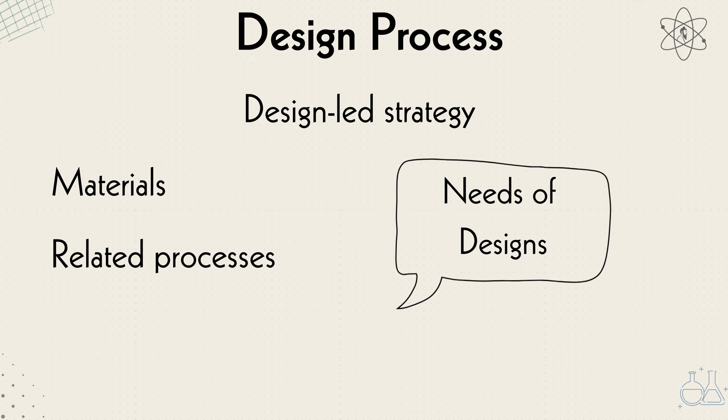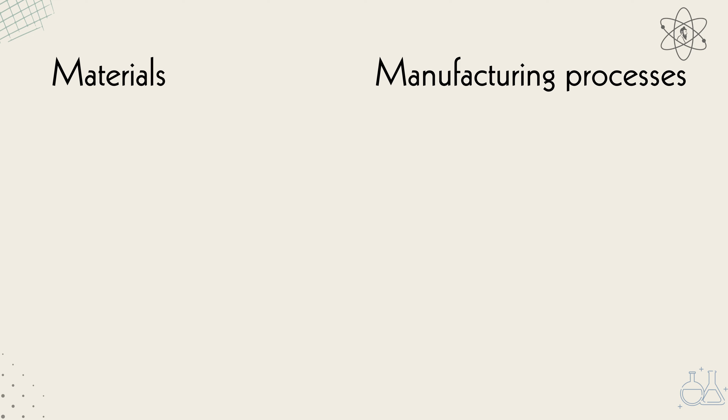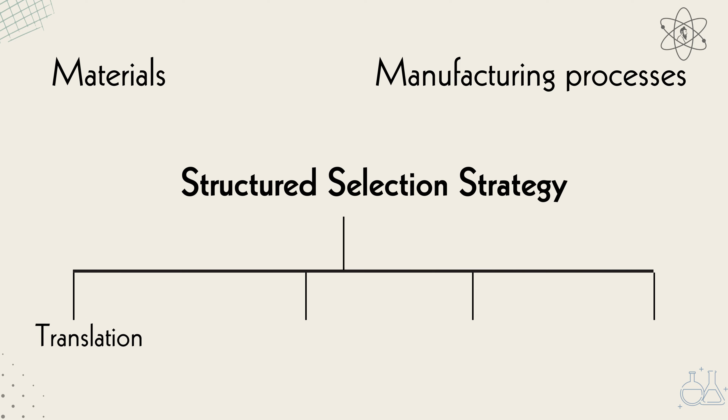Design begins with the market need. That need is analyzed and turned into a set of design requirements. From there, ideas called concepts are explored, developed, and refined into a detailed product specification. Material and process choices aren't separate, they evolve alongside this development. With that foundation, we can move into a structured selection strategy. It unfolds in four key steps: translation, screening, ranking, and documentation.

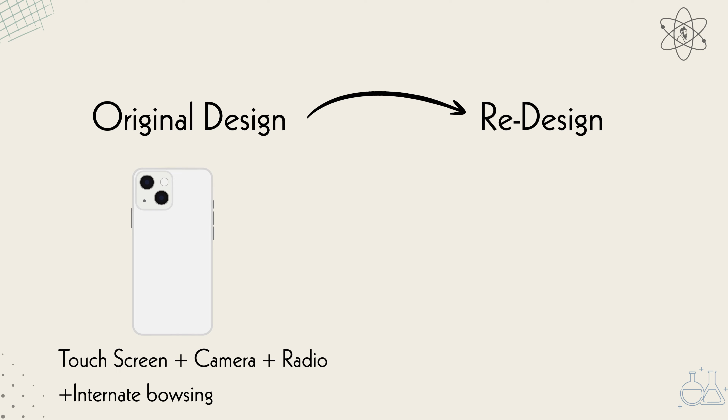There are two types of design: the original design and a redesign to the original design. Original design begins with a fresh idea, something entirely new. It involves building the information and system needed to bring that concept to life. Evolutionary design, on the other hand, starts with an existing product and refines it, boosting performance, cutting cost.

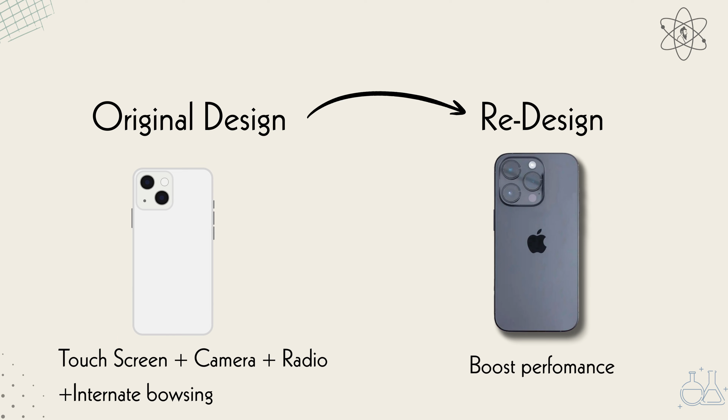Sometimes the demand of a new product leads to the invention of entirely new materials. Nuclear power led to the creation of zirconium and advanced stainless steels. The space race drove innovation in beryllium alloys and lightweight composites. And today, turbine engines push the boundaries of high temperature alloys and ceramics.

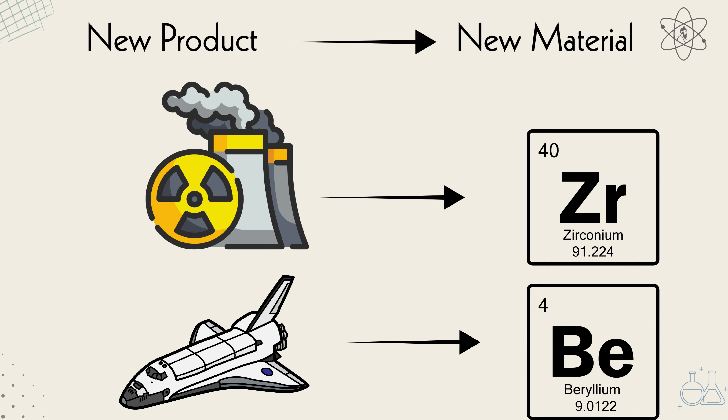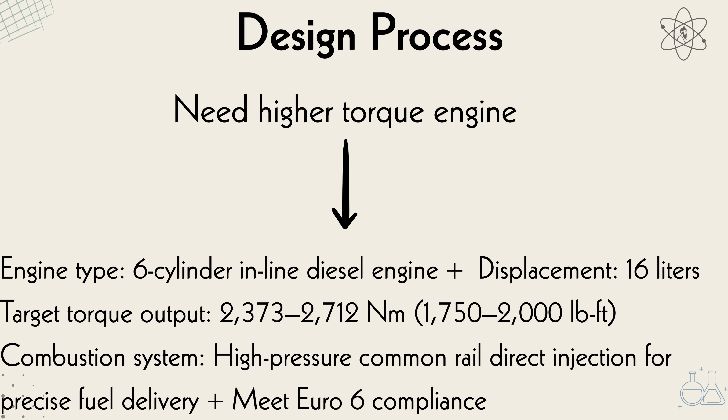But this is not always the case. Design always begins with a need or a bold idea and ends with a full product specification. But no need can be met unless it's clearly defined. That's why every design journey starts with a simple focused statement: a device is required to perform task X. This becomes the foundation of a clear set of design requirements.

In the conceptual design stage, all possibilities are on the table. The designer explores different concepts, experimenting with how they can be combined or separated to meet the design goals. Once promising ideas are identified, the process moves into the embodiment stage.

In the embodiment stage, the concepts are analyzed in more depth. Components are roughly sized and clear choices of material and processes are made to understand the performance and cost implications. This stage results in a workable layout, which then feeds into the detailed design phase.

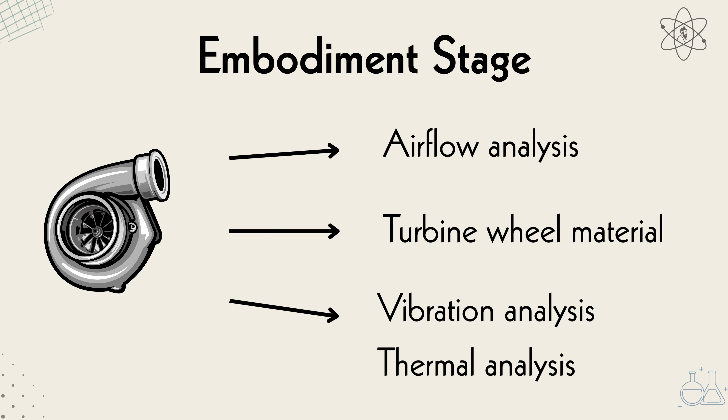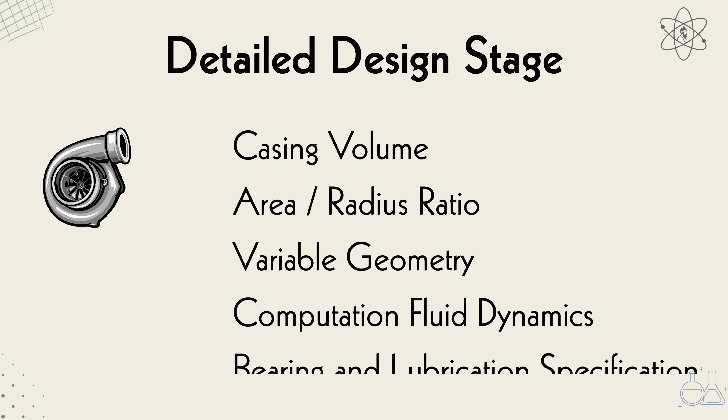In the detailed design phase, every component gets fully defined with precise dimensions, specifications, and often mechanical and thermal analysis. Optimization techniques are used to fine-tune the system for maximum performance, minimum cost, and safety. The final materials, geometries, and production methods are selected. By the end, a complete product specification is in place.

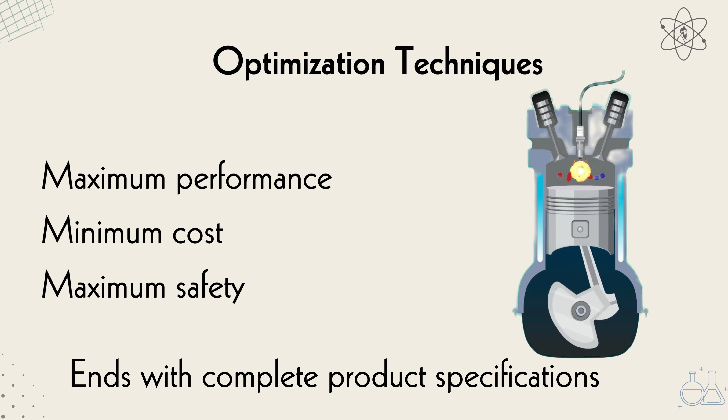Now let's talk about redesign. It's worth noting that most design work isn't about inventing from scratch. It's a redesign, building on existing products, solving problems, improving performance, and cutting cost, without changing the core principles or discarding well-functioning parts.

Redesign often begins with a problem, and there are several scenarios that call for it. The most urgent is the product recall situation. If a product on the market fails safety standards, redesign becomes critical. Often, the root cause is a material failure. In such cases, a new material must be selected, one that keeps the strength of the original while fixing its flaws.

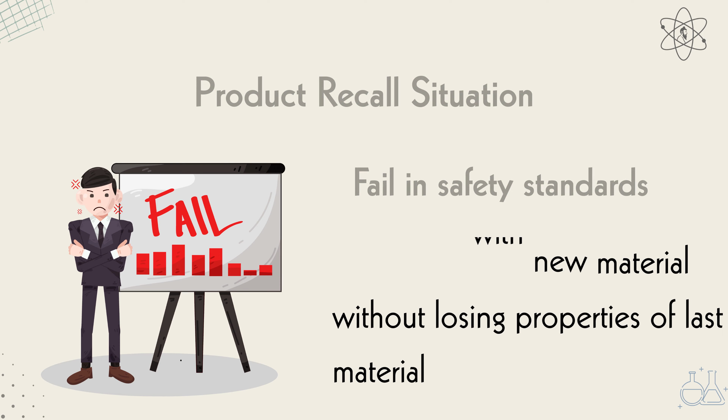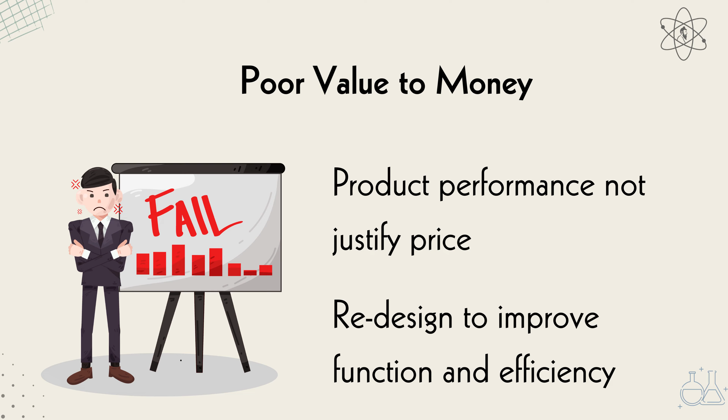Then, there is a poor value for money scenario. The product may be safe, but its performance doesn't justify the price, prompting a redesign to improve a function or efficiency. Since much of a product's cost comes from materials and processes used, the solution is often to rethink both with cost cutting in mind.

Another common driver is competition. In fast moving industries like consumer electronics or automotive, new models are rolled out every year or two. To stay ahead, companies must continuously refine and innovate, often through material or design upgrades.

But the role of material doesn't stop once production begins. Products can fail in real world use, and every failure tells a story. Wise manufacturers gather and analyze this data. It often reveals a mismatch between material and use, something that smart redesign can correct.

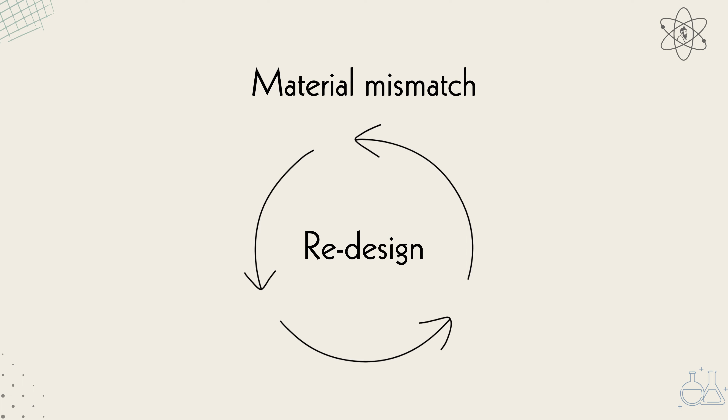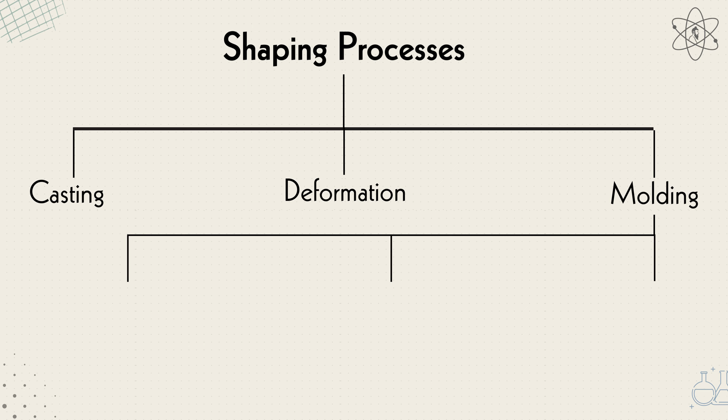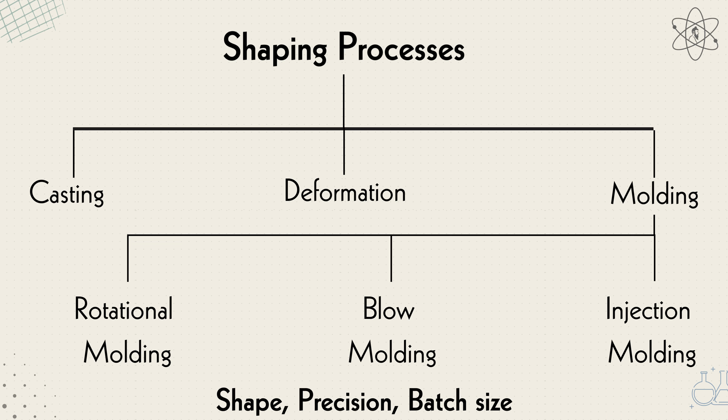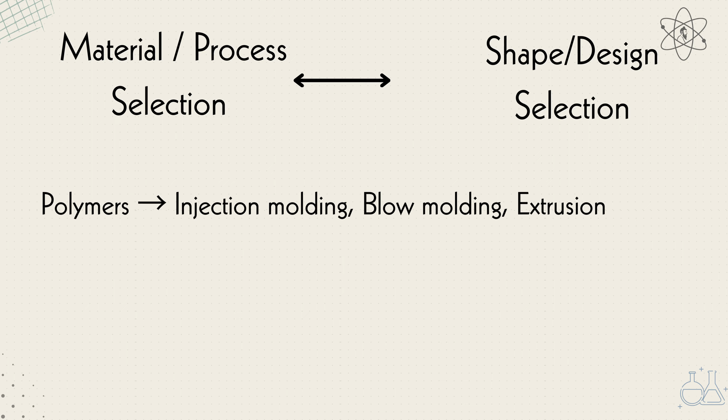The choice of process is closely tied to the material. The material's formability, machinability, weldability, and heat treatability all affect what processes can be used. At the same time, the requirements for shape also influence process choices, because the process defines not just the geometry but also the size, precision, and cost of the component. It's a two-way interaction: specifying a shape can limit your material and process options, and choosing the process can limit which material and shape are possible. The more complex the design, the more tightly these factors are linked.

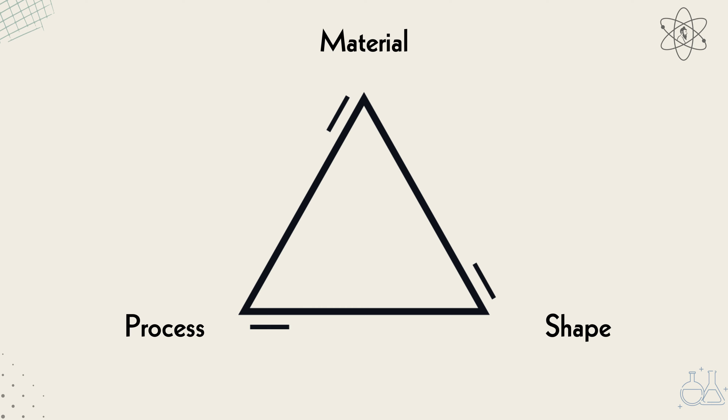At the center of all this lies the crucial interaction between material, process, and shape. And to manage it effectively, we need a design strategy. That strategy has four key steps: translation, screening, ranking, and documentation.

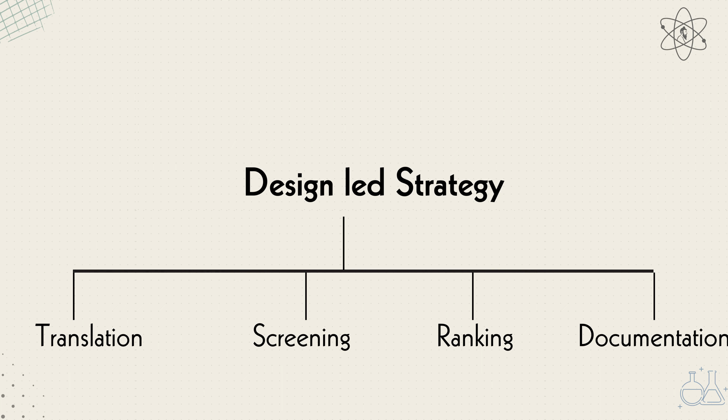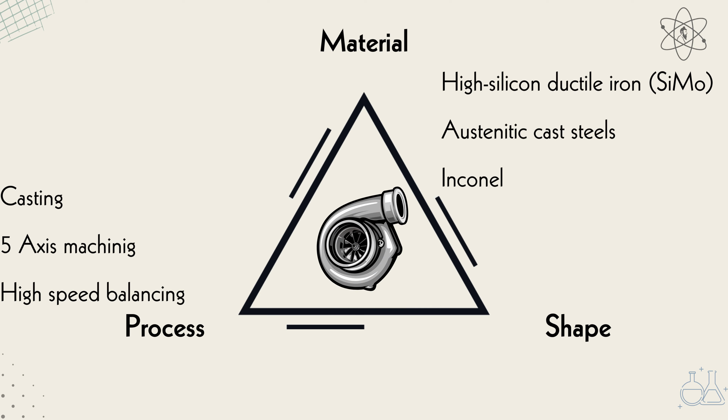Selection begins with finding the best match between what a design needs and what materials and processes can deliver. Keep in mind that materials and processes must be compatible. The first step, translation, is about turning design requirements into technical language, identifying constraints that must be met and objectives to optimize. This acts as a filter. Materials that pass the constraints and perform well on the objectives move forward.

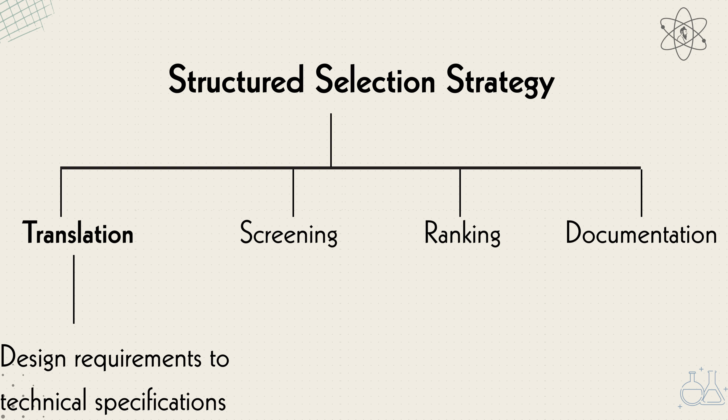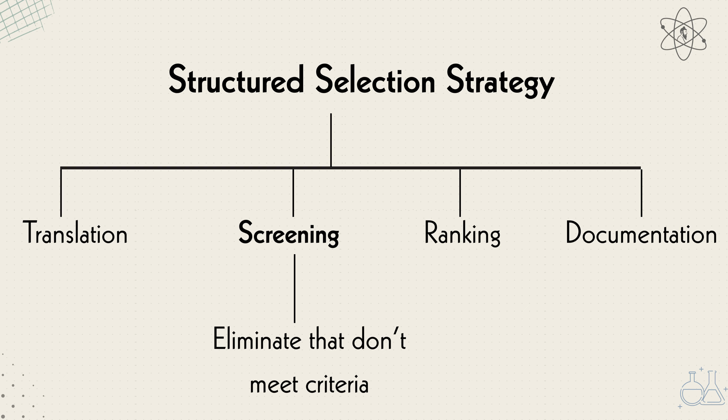Next comes screening, eliminating all the materials that don't meet must-have criteria. Then, in the ranking stage, the remaining candidates are ordered based on performance metrics like cost, weight, or strength.

Finally, we dig deeper into the top choices. We look at how they are used today, how to design effectively with them, and what case studies, both success and failures, can teach us. The last step is called documentation, and it completes the selection process.

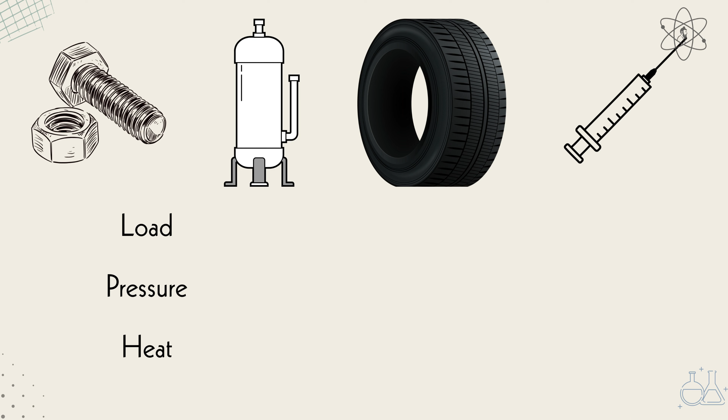Every engineering component is built to perform one or more functions, whether it's supporting a load, containing pressure, or transferring heat. But achieving that function comes with constraints. There may be a fixed dimension, limits on how much load a part can carry, or requirements to conduct or insulate against heat or electricity. The component also has to perform within a specific temperature range and environmental condition.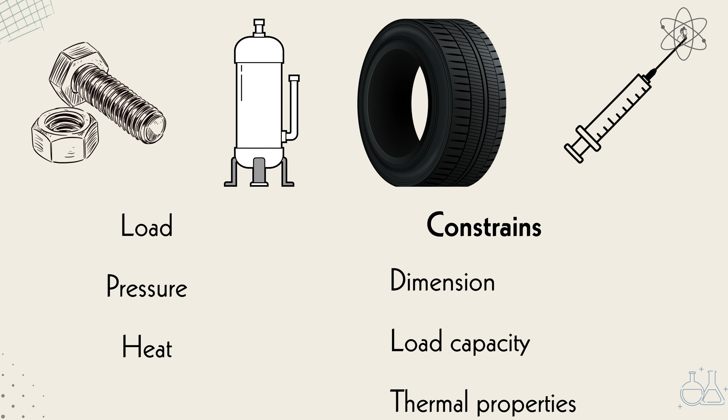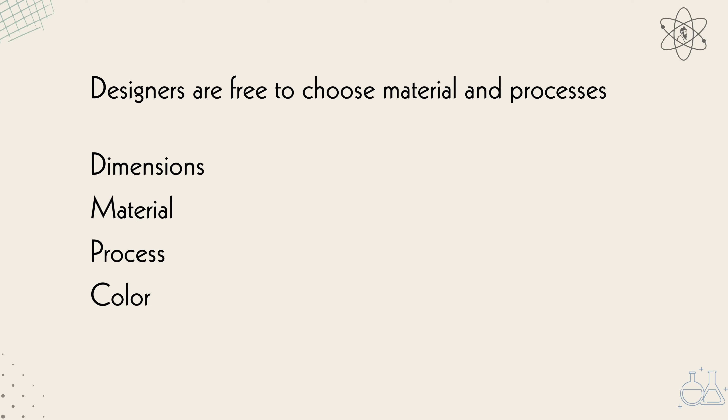Within these boundaries, the designer still has some freedom. Dimensions are not fixed, but can be adjusted. And most importantly, the designer is free to choose the material and processes to shape it. These adjustable factors are called free variables.

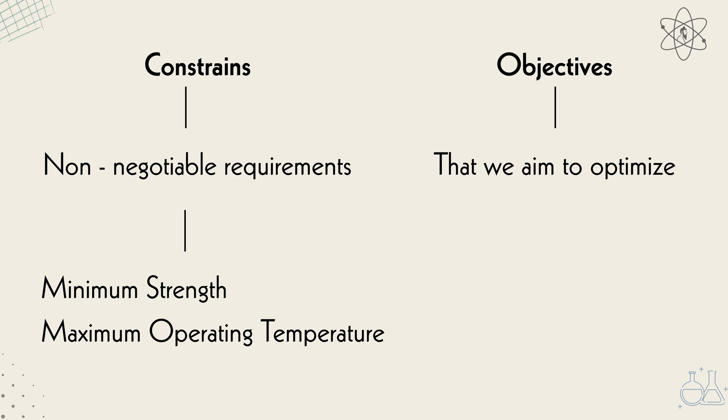It's essential to understand the difference between constraints and objectives. A constraint is a non-negotiable requirement like minimum strength or maximum operating temperature. An objective, on the other hand, is something you aim to optimize, usually by minimizing or maximizing a specific property like cost, weight, or performance.

For a super light sports bicycle, the main objective is to minimize mass while keeping cost within a limit, making cost a constraint. But for an affordable city bike, the roles are reversed. The goal becomes minimizing cost, and keeping weight below a certain level is now a constraint.

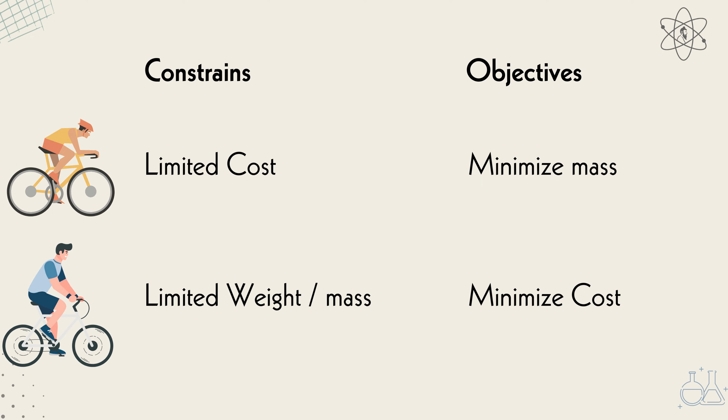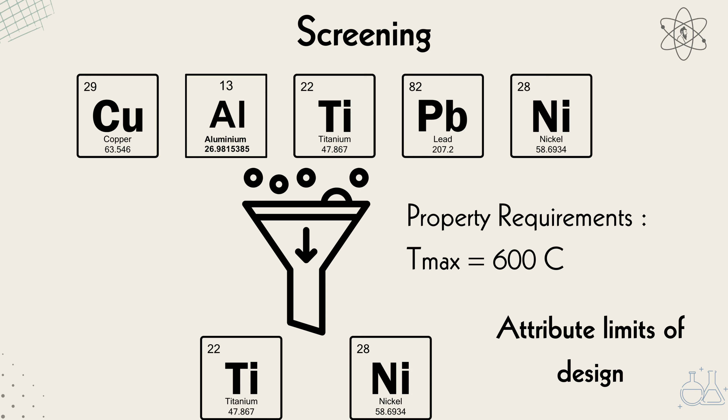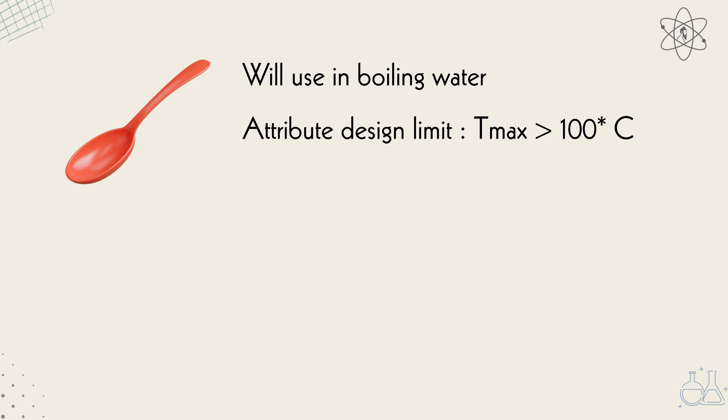Screening helps narrow the field by eliminating materials that simply can't do the job because one or more of their properties falls outside the required limits. These limits, known as attribute limits, come directly from the design constraints. For example, if a component must operate in boiling water, it needs a material with high enough service temperature. If it needs to be transparent, optical clarity becomes non-negotiable. Materials that don't meet this criteria are ruled out immediately.

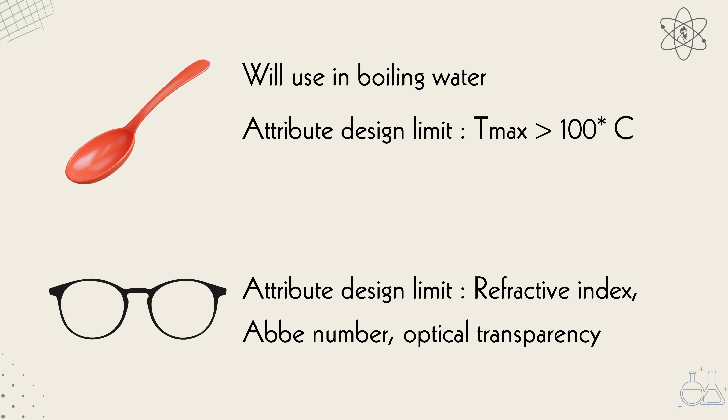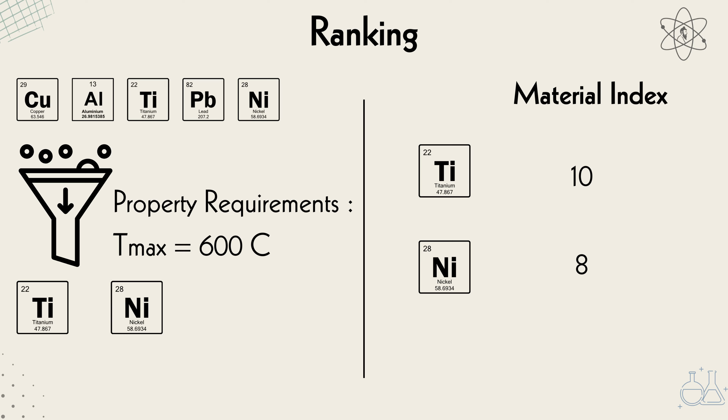Once the screening is done, the next step is ranking. Here, we need a criterion of excellence, something to tell us which materials perform best under the given design loads. Sometimes that means focusing on a single property like low density for buoyancy or low thermal conductivity for insulation. Other times it's a combination of properties bundled into what we call a material index. This index helps us compare performance across materials. So in short, screening filters out what won't work and ranking highlights what works best.

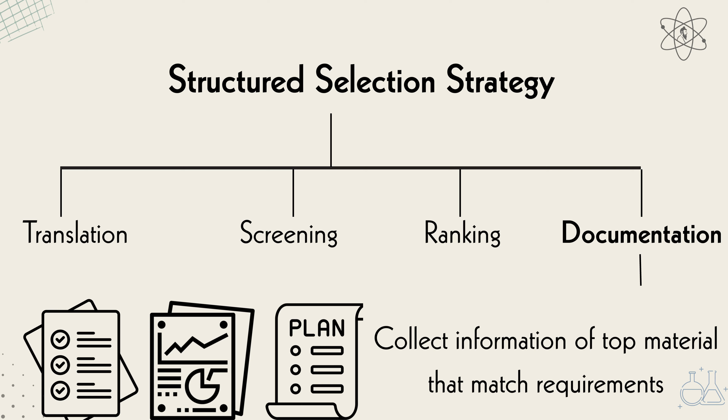The final step in material selection is documentation. This is where we gather detailed information on the top candidates. It can take many forms: descriptive data, charts, case studies, or visual references. You will find detail on past applications, corrosion resistance in specific environments, availability, pricing, and even environmental impact or toxicity warnings. This information comes from handbooks, supplier datasheets, digital databases, and trusted websites.

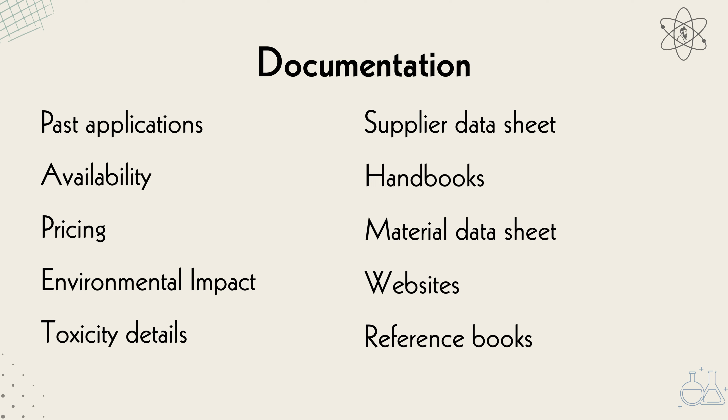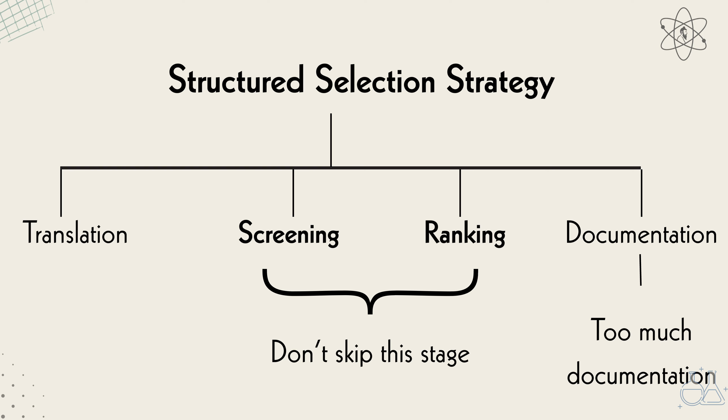Documentation helps refine the shortlist, guiding you toward a final choice that truly matches the design requirements. And this is why the earlier steps, screening and ranking, are so important. Without them, the list of possible materials is huge, and diving into all that documentation would be overwhelming. But once you have narrowed it down to a few strong candidates, the search becomes focused, efficient, and effective.

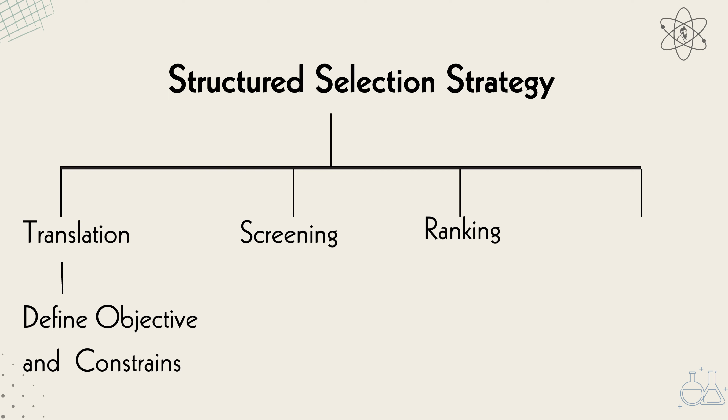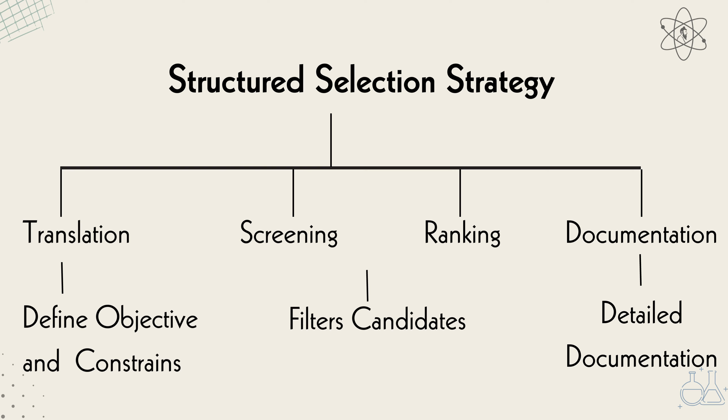So, selecting the right material and process starts by translating design needs into clear constraints and objectives. Through screening and ranking, we narrow down the best candidates and finalize the choice through detailed documentation. This structured approach makes selection efficient, focused, and reliable.